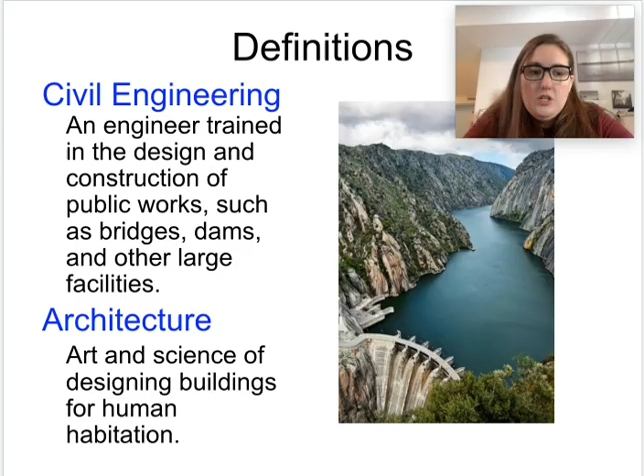of China. Until modern times, there was no clear distinction between civil engineering and architecture, and the terms were used interchangeably. However, in the 18th century, the term civil engineer came to be used to distinguish from military engineers. Architecture was born when people began to live in constructed dwellings and within communities. Caves were last used as habitats around 8000 BC.

Early engineering was centered around food; the development of tools and ways to increase the efficiency of farming and hunting were documented, first in cave paintings and later in Egyptian hieroglyphics. The history of civil engineering and architecture projects is regional in nature. The development of building design and construction on an African grassland differs greatly from the building design and the construction in Alaska or in the mountains of Peru.

A major reason for differences in the development of construction techniques is the availability of local resources. Although it is possible to import materials from great distances, the historic reality is that people often used what was easily available to them when constructing buildings. This influenced architectural style and the selection of structural elements. For example, sun-dried bricks can support loads in a dry climate, but will disintegrate in wet climates.

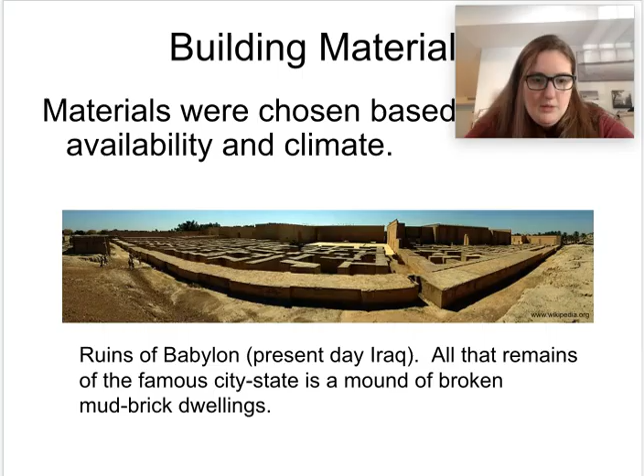The pre-Columbian Inca site of Machu Picchu sits on a mountain range in Peru. The central buildings of Machu Picchu use the classic architectural style of dry stone walls in which blocks and stones are cut to fit together tightly without mortar. Because of their durability, examples of stone and brick buildings from past civilizations do exist. However, few examples of ancient buildings exist where there are less durable materials, such as wood and grass.

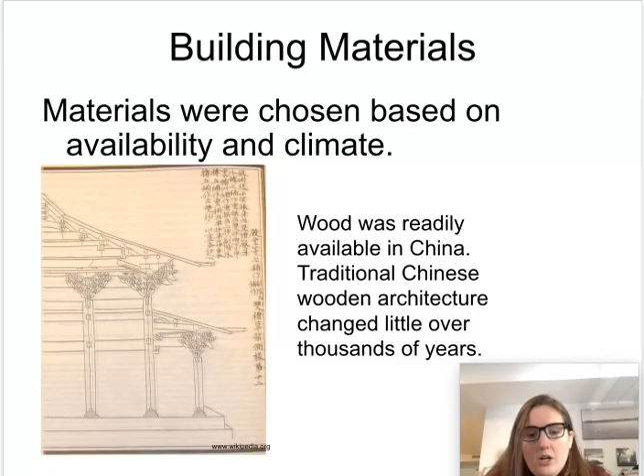In China and in Japan, most ancient buildings were constructed of wood, except for the tile roofs. Because wood tends to deteriorate over time, few examples of ancient Chinese buildings exist. However, the Chinese have long standardized uniform features of structures through manuals and drawings that were passed down through the generations. Therefore, we can determine that Chinese architecture changed little over thousands of years.

Vernacular architecture is a term used to categorize methods of construction which use locally available resources and traditions to address local needs. It is often viewed as crude and unrefined. So that basically means raw, like rough materials. But many modern architects have claimed inspiration from vernacular architecture.

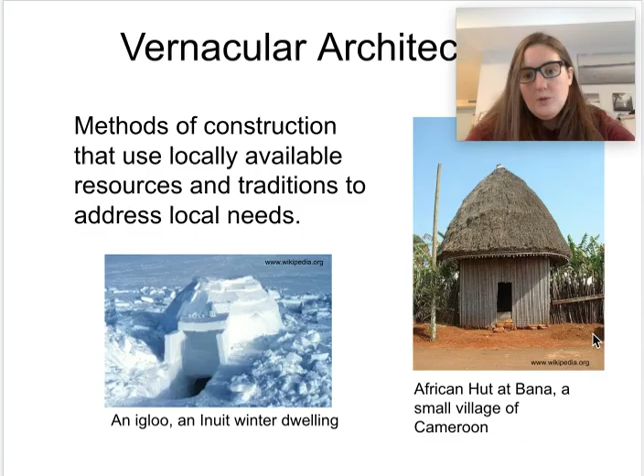So here you can see, probably in Alaska or northern Canada, an igloo, which is Inuit. Inuit are the native people of Alaska and North America. And that is obviously an igloo made of ice and snow. Over here we have an African hut that was built in Cameroon, and you can see it's built with mud and straw and probably some sticks or some type of wood.

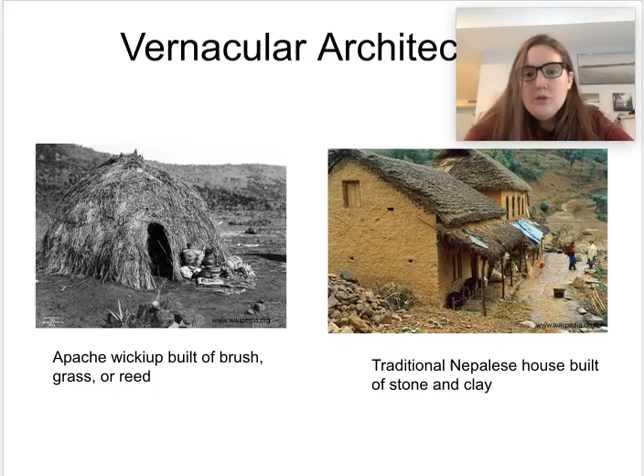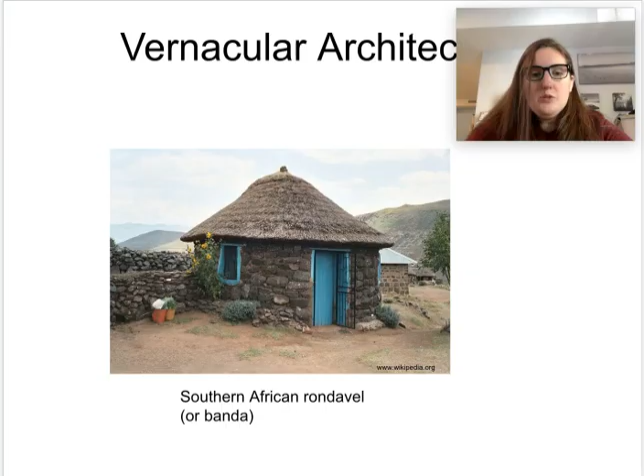This is an Apache wickiup built out of brush, grass, and reed. And on the right, this is a traditional Nepalese house built with stone and clay. This is an example of a rondavel or banda. It's built in South Africa, and it's built probably mostly of mud and straw, as well as possibly some types of clay, depending on the soils.

The earliest known structures were pyramids. Pyramids in Egypt were built as monuments to house the tombs of pharaohs. The earliest known architect was Imhotep of Egypt. He was known for creating the first step pyramids.

The pyramid was a solid structure, but many early buildings were bearing wall types. Bearing walls are solid walls that provide support to each other and the roof. The building next to the pyramid in the right image illustrates a bearing wall system. So here you can see these are your walls, and then you've got a structure going across the top. They're load-bearing walls. That means they're carrying the weight of the actual building to the ground.

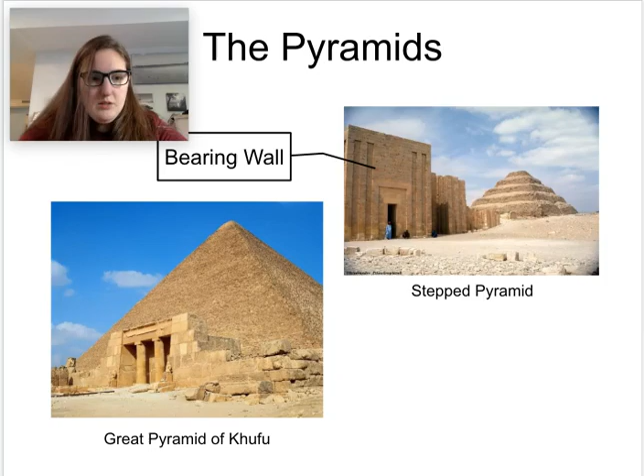Modern buildings are concerned with aesthetics as well as functionality. Aesthetics is the quality of an object that deals with art, beauty, and taste. The Parthenon was built to house the statue of Athena, Greek goddess of war. Like other temples of its day, it was designed to be seen from the outside only. The Parthenon is an example of a post and lintel construction: horizontal beams placed across vertical posts.

This form of construction came about due to an early problem in architecture. How can the door and the window openings be provided in bearing walls without sacrificing support? Post and lintel construction is an example of the early frame system. The columns of the Parthenon are closely spaced because it is made of stone, which has little tensile capacity, meaning it's not able to bend a lot. Greek temples showed the change from wide columns to more slender columns.

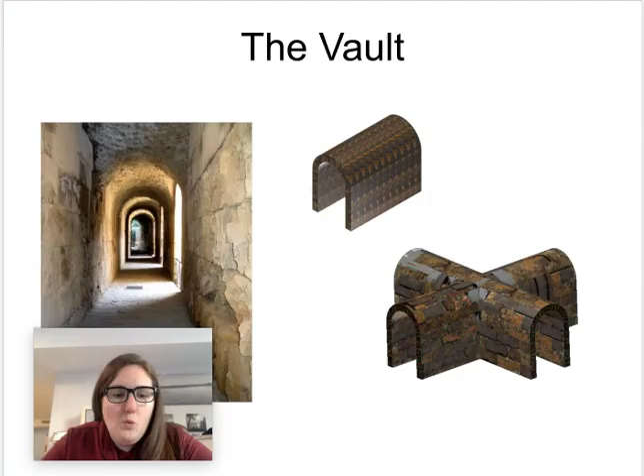The development of the arch led to the development of a vault, which is a series of arches that form a continuous arched covering. When two of these vaults intersect, a cross vault is created. So this is just a plain vault here, and then this one's a cross vault. Another name for a cross vault is a groin vault. Vaults allow for the construction of bridges, walkways, and other passages.

Another form that developed from the arch was the dome. A dome is an arrangement of several arches whose base forms a circle, and the tops meet at the center.

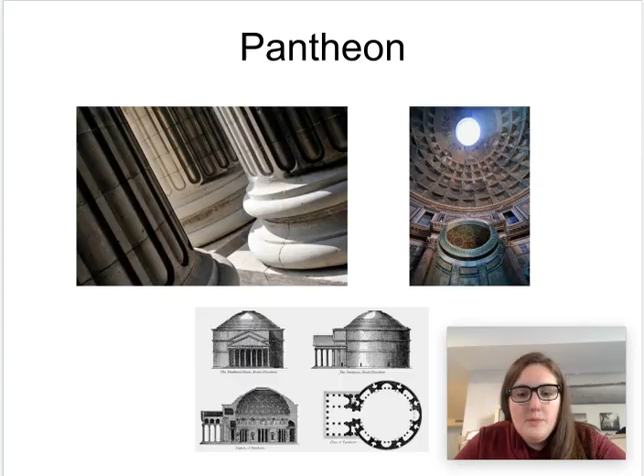The Pantheon is an example of an arch and dome system. It is the oldest standing dome structure in Rome. Two amazing aspects of the Pantheon have to do with the materials used to create it. The Pantheon's concrete was a mixture of volcanic ash, lime, and some amount of water. The mixture was packed, not poured into place.

The Great Wall of China is one of the most ambitious construction projects the world has ever seen. It spans 4,500 miles. Construction spanned from the 5th century BC to 16th century AD, which is 2,100 years. Just imagine that, 2,100 years. Like, if they started building it at the time of Jesus, we would still be building it now. The wall as seen today is mostly constructed during the Ming Dynasty of stone and bricks.

The need for dependable water supply for domestic and agricultural purposes led to the construction of dams, canals, and aqueducts. This usually involved conducting the water over long distances. The engineering involved constructing the massive dams and solving problems associated with getting water to flow to its destination. Since water flows downhill, a combination of canals, tunnels, and aqueducts were required.

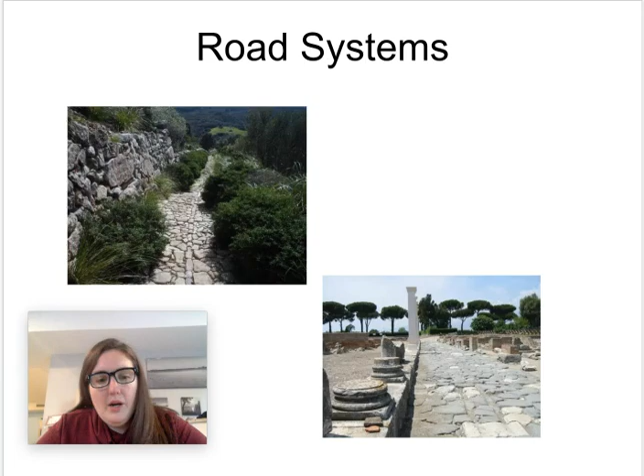Romans were generally believed to be masters of road engineering. At the height of their power, they had constructed 50,000 miles of paved roads. No other comparable road system existed outside of the Roman Empire.

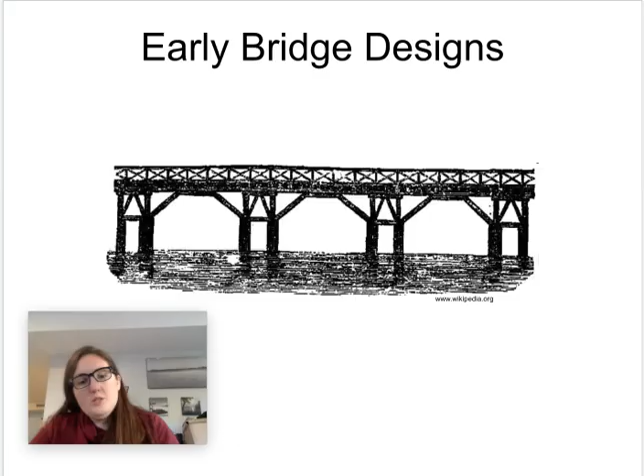The earliest known Roman bridge, the Pons Sublicius in Rome, was made of wood and was constructed using columns and beams. The pile foundation was created by following specific steps: excavate, clear, and then drive previously charred olive or oak piles into the ground as close to each other as possible. The spaces were filled with ash, and this is an example of a timber bridge.

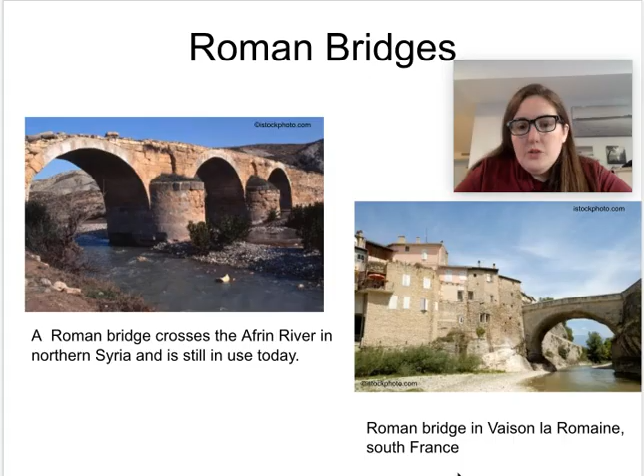Most ancient Roman bridges used the arch as a basic structure, and were typically made of stone and concrete. So this one is a bridge across the Afrin River, which is now northern Syria, and it's still used today. And then this is a Roman bridge in the south of France.

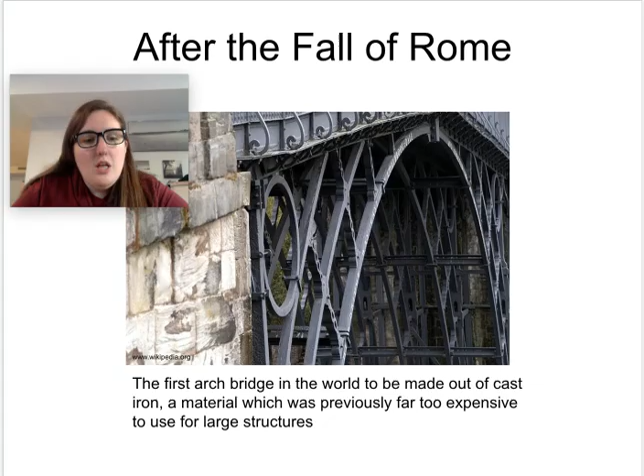The first cast iron bridge ever built was over the Severn in 1779. A new blast furnace nearby lowered the cost and encouraged local engineers and architects to use iron to cross the river. The use of iron allowed for longer spans and lighter structures.

Structural steel. The Eiffel Tower is one of the last iron structures, marking the end of the Iron Era. In the 1890s, steel replaced iron as a material of choice for large construction projects. Although it contains iron, steel also contains carbon, which makes it harder and tougher. In addition, steel is less susceptible to corrosion.

The concrete mixture used by the Romans was very weak in tension, so that's stretching and bending. Experiments with improving the tensile strength of concrete by embedding metal rods into the mixture began in the 1800s. Eventually, engineers learned how to do it efficiently so that they could make bigger buildings that could withstand more tension and more bending. Since that time, reinforced concrete has been used for a variety of construction projects.

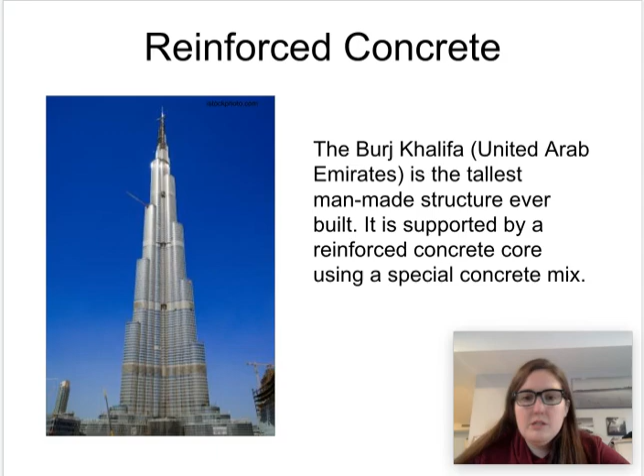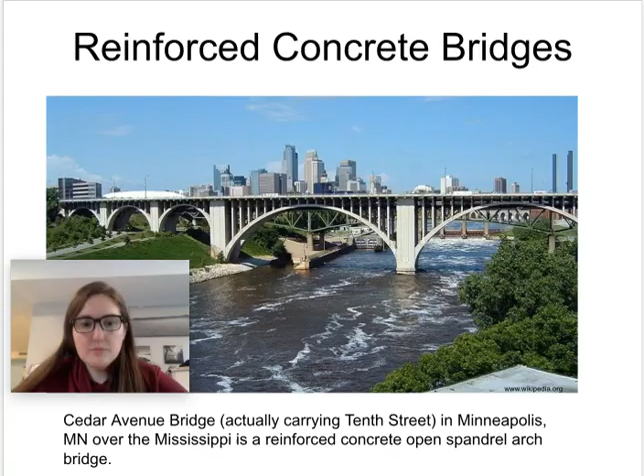So this is an example of a building in the Arab Emirates. It's the tallest man-made building, and it's built using reinforced concrete. Engineers quickly understood that reinforced concrete could be used in the design and construction of bridges. The first reinforced concrete bridge was built in France in 1875.